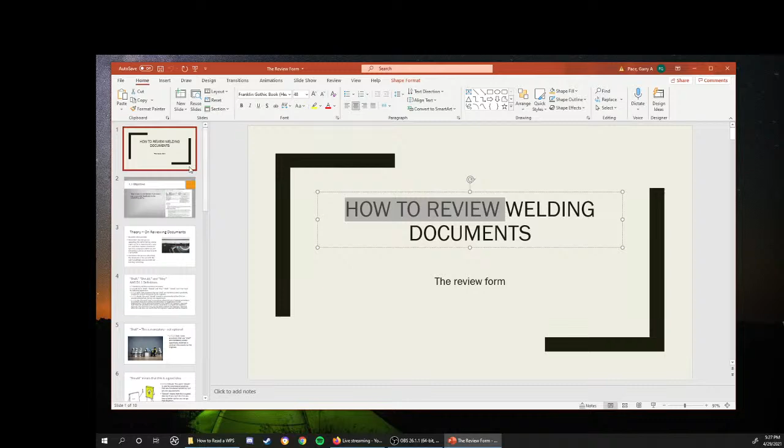So we're going to get back to talking about how to review welding documents, kind of a conversation I was having yesterday. I'm going to rehash some of the stuff from yesterday before I dive into new material. See if anybody's going to show up. We had 10 yesterday, so maybe we can shoot for like 12, really break the curve.

So in regards to reviewing welding documents, my theory is, be polite. Not that I'm afraid to get into a scrap, a fist fight or a physical altercation, but to disagree with somebody in their interpretation of the code or what their deliverables are in regards to what the expectation is for a WPS and a PQR.

A lot of times, though, when you're reviewing WPSs and PQRs, the person that's the author of the document you're reviewing might not be as experienced as you are. They might have just gotten thrown into this. Maybe it's a new CWI. We've all been there, new in our careers, and wondering, what's this code stuff?

So, be polite. Sometimes it's a teaching experience. You're passing on some knowledge and explaining to people what you want and what you expect. That's one way to look at it.

And sometimes, if you go at it from that direction and explain stuff to people, the next time you need something from them, it's not nearly as acrimonious. But sometimes the person submitting the document might be a code guru, and you're the one that's maybe learning something from them. So this is something we need to keep in mind.

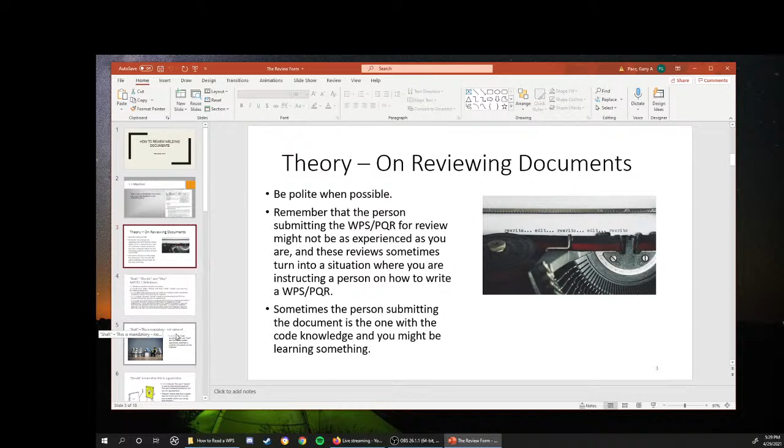Yesterday I covered shall, should, and may. Shall is, the empire's here, you got no choice. The stormtroopers are coming to get you, you got no choice. Mandatory unless specifically modified in the contract documents by the engineer.

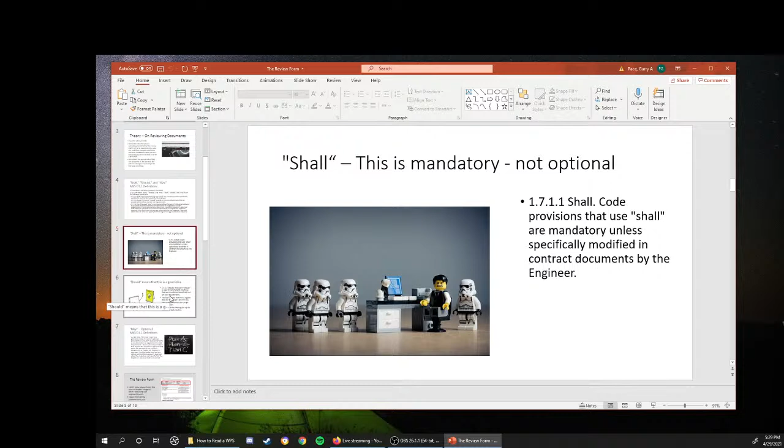So, shall. And these are the words that I use when I'm trying to explain something to somebody. Shall. Should. Should means, hey, this is a good idea. This is setting you up for success. Should means it's a good idea, but if you can't do it or you have a better option, you can go that direction. Should is just a best practice and a pretty good ticket to success. So that's what we're talking about with should. It's not mandatory, but it's a really, really good idea because they listed it in the code.

May is optional. You may do this, you may do that, you could do this. May is the complete other end of the spectrum from shall.

So, those optional procedures that require the engineer's approval shall either be specified in the contract documents or require the engineer's approval. The contractor may use any option without the engineer's approval when the code does not specify that the engineer's approval shall be required. So the engineer's got a lot of play in this too, in regards to the codes, what you can and can't do. If the engineer says, no, you're not going to do this, then that's pretty much the end of the discussion there. So that's where we got may.

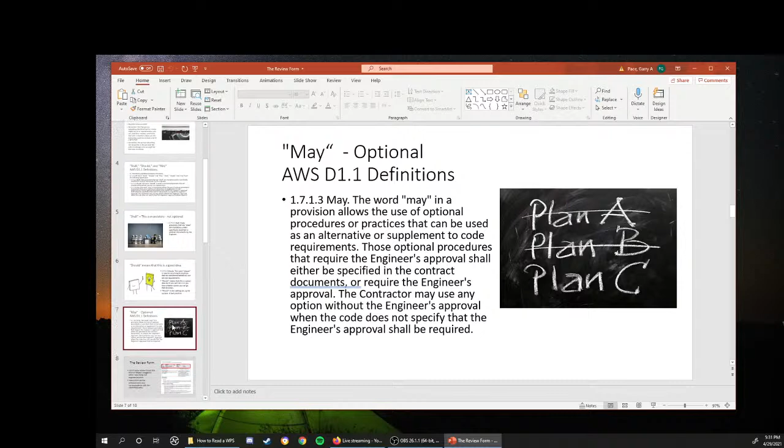And then I also discussed, and we'll keep coming back to this one, the review form. I like to have a review form. The review form I generally use is one that I made up, but we went through this yesterday. This is a grown-up way of communicating with the person, the organization, whose documentation you're reviewing. Instead of just circling a bunch of stuff on their WPS and throwing it back to them like you're a 5th grade teacher telling them to fix it, you explain to them what's needed.

All right, this is a little more work than just circling things, but if you do it like this, once you do one or two of them, the same code mistakes are going to pop up over and over. Once you get one of these sheets made up, it's just duplication.

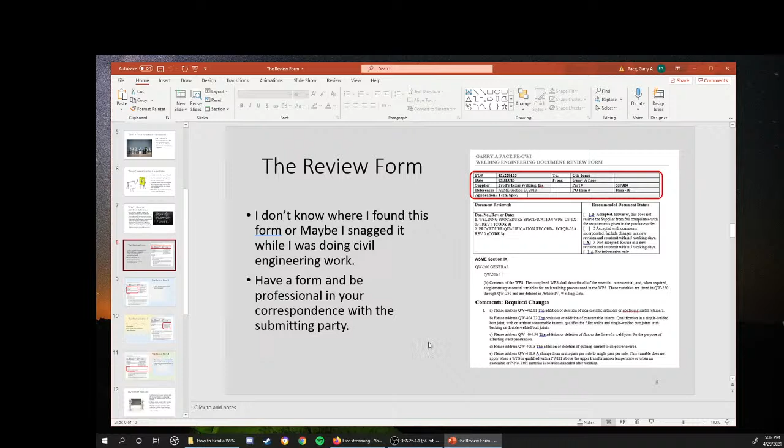So you can go at it this direction, or maybe there's some other directions, but I really prefer a sheet. And we talked about the documents that were reviewed and where to put things on these ones. The document disposition, accepted, not accepted. Different companies have different ways that they address this. There might be 4 choices or 5 or just 3. But this is what I use on the review form.

Does anybody have any questions?

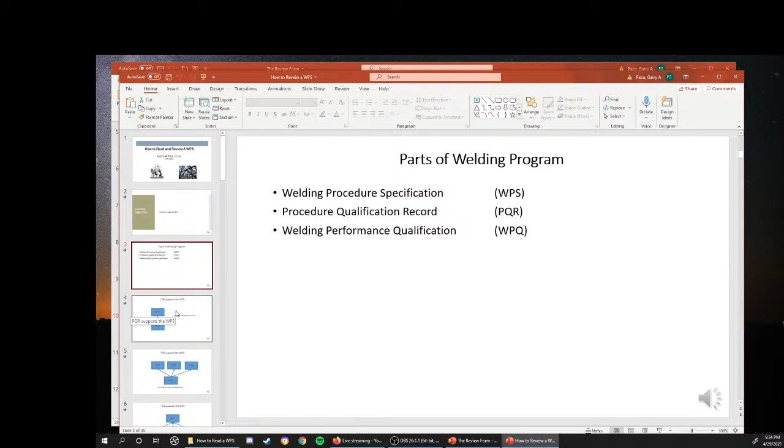So we've got a welding procedure specification, a procedure qualification record, and a welding performance qualification. Those are the 3 main tools of documentation we use to show people that we have grown-ups in charge of the welding we're doing. That's what separates somebody welding a dumpster from somebody doing pressure vessels. Nothing against our brothers in the materials joining field building dumpsters, but I'm just saying, these are the main parts here.

So the PQR supports the WPS. One PQR can support one WPS. This isn't a one-to-one relationship, this is a one can support. A PQR is much like a driver's license, and it would support a WPS.

Let me back up. A PQR is like a birth certificate, and it would support a WPS much like a birth certificate would support a driver's license. You can't get a driver's license without a birth certificate, or a passport without a birth certificate. A PQR is the same way. It's a base document that we use to support other documentation.

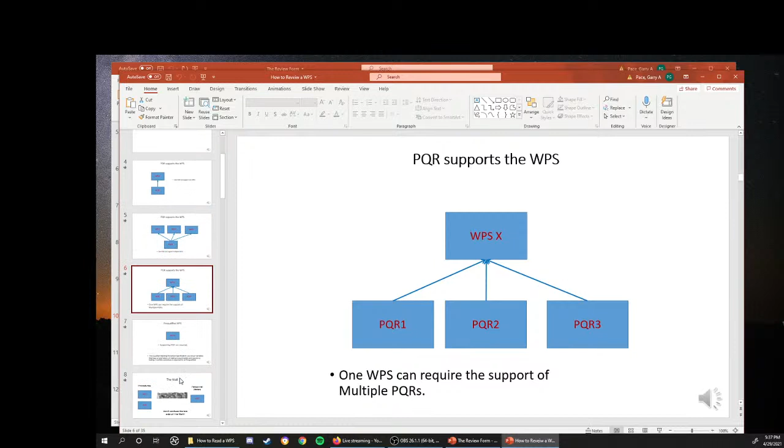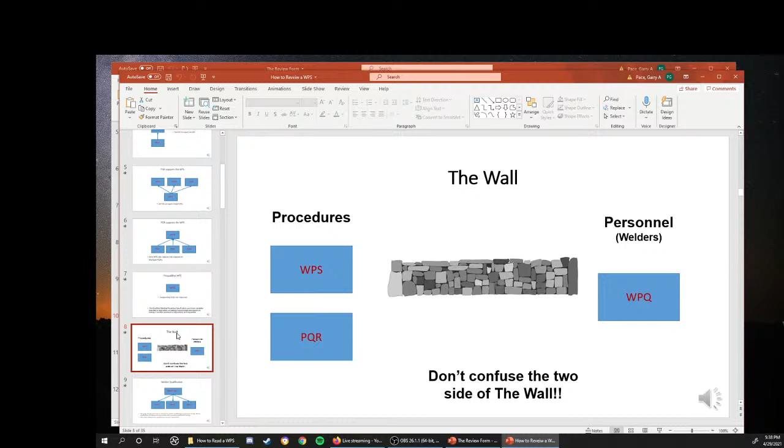All right, so another thing we need to remember is that there's a wall between procedures, WPSs and PQRs, and personnel. So we don't want to mix and match. When you're reviewing documentation, you need to realize the WPSs and PQRs are on one side of this wall, and then personnel qualifications, welder qualifications, are on the other side. You don't mix and match these, because you're going to confuse yourself and get into all kinds of trouble. So you need to realize this is how the codes are set up.

So in welder qualification, a welder qualifies to a process. The welder doesn't qualify to a specific procedure, a welder qualifies to a process. And generally there's only 5 or 6 essential variables for a welding process for personnel qualifications. So that's one of the things we need to understand. It's not nearly as restrictive as procedure qualification.

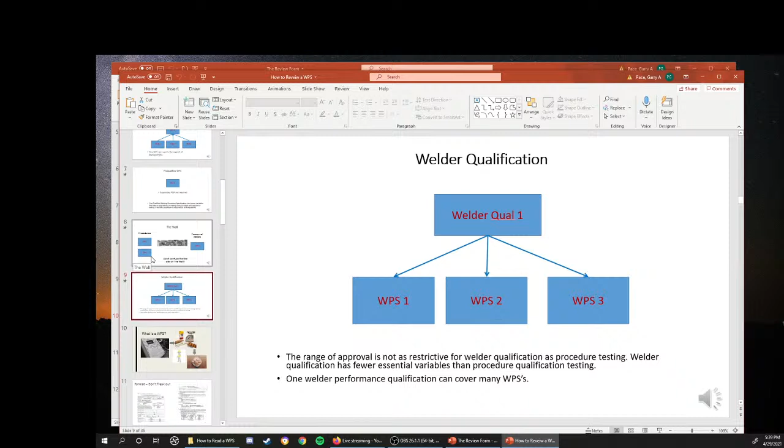So we already talked about yesterday, what is a WPS. A WPS is basically a recipe. It's telling us how to bake chocolate chip cookies, that's what it's telling us. If the WPS says we need to stand on our head and drink a Dr. Pepper while welding, that's what we need to do. That is not optional. A WPS is a work instruction, is what it is.

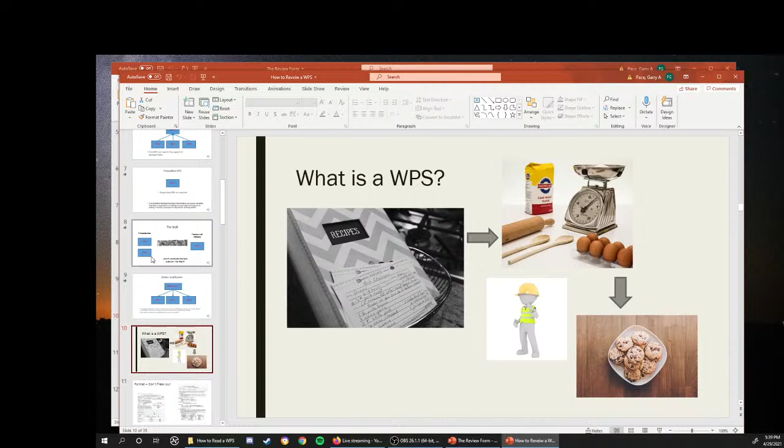And as such, a lot of times we need to review those. And I'm going to switch over here for another, see if I can find that other one. Does it make sense? All right.

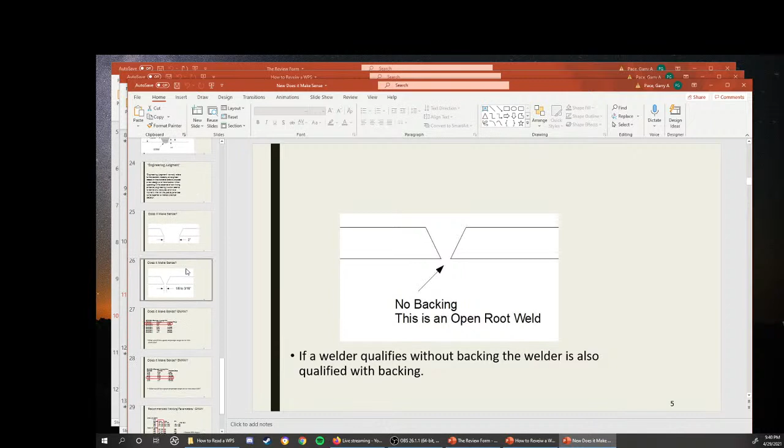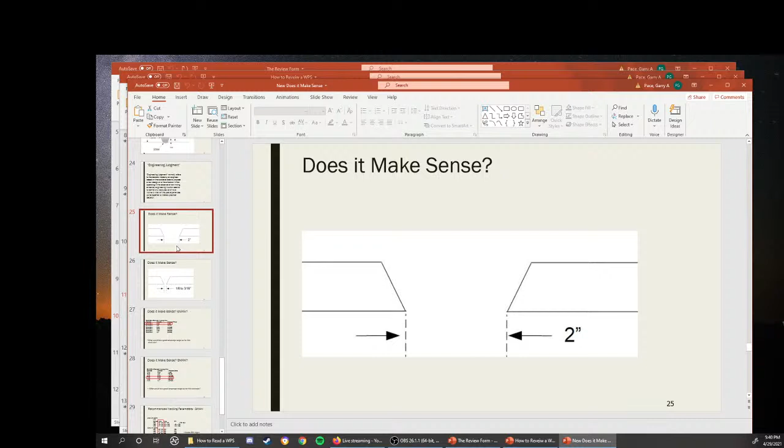So a lot of this stuff, when you're reviewing a WPS, you got to ask yourself, does it make sense? Does this make sense how we're doing this? Like if you look at the groove weld, and they have a super wide root gap that's 2 inches wide, you got to question that. Does that make sense? Why are they doing this? Did they qualify it this way? What's the idea behind this? If they qualified it and that's their joint design, but sometimes you generally have to ask, does this make sense? Makes a little more sense if you're at 1/8 to 3/16 of an inch, but it could depend on what kind of weld you're making or what your joint looks like.

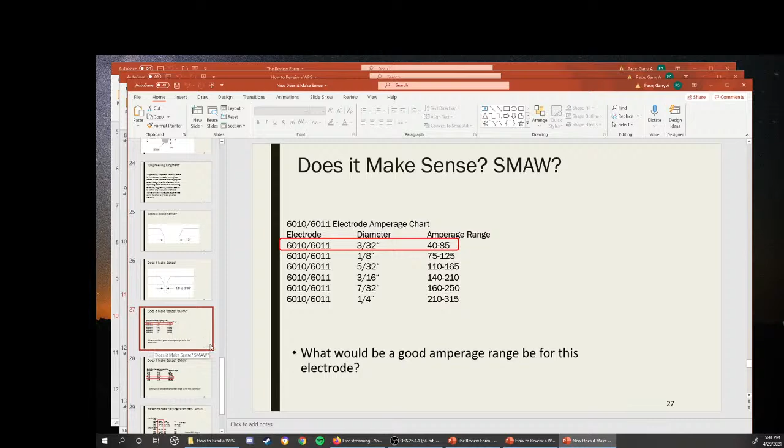And then when we get into electrodes, filler materials, amperages and voltage, you have to ask yourself, does it make sense? What do they have listed there? For 3/32 6010, generally we run that from 40 to 85 amps. On their WPS, would it make sense if they were running it at 300 amps? Probably not. So these are things we need to keep in mind when we're reviewing WPSs, is does it make sense?

So, all right, we're going to flip back here from does it make sense to format. Don't freak out. The formatting doesn't matter. Most codes have a recommended format, but if somebody turns in something that's a little different than what you are used to seeing, as long as they address everything, don't freak out on the formatting.

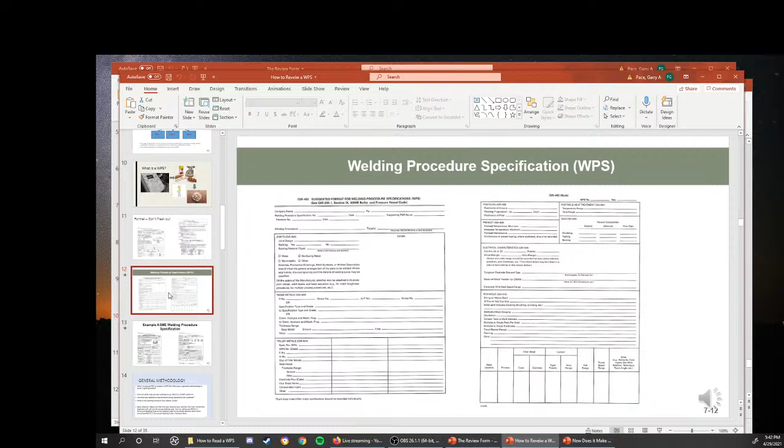And here's a standard WPS, ASME Section 9, and what it should look like. Should, and I say that in air quotes, should look like because of the standard suggested format for this. This is what the American Society of Mechanical Engineers offers up.

So my general methodology is I like to try and give it a quick check. Before I start reading the WPS too thoroughly, I like to just give it a quick check and make sure the correct company's there, WPS and supporting PQRs are there, or did they send me the correct code? Because before I dig into this, I want to make sure that the code matches up with what the work that is being done.

So, the welding process, the base metals, what do we got going on? If they submitted a WPS that has submerged arc welding and the project is sheet metal, does that make sense? Probably doesn't make much sense. So you kind of got to look at these and give them a quick once over before you really dive into it, and you start reviewing this and you realize, oh man, I got an hour into this document and there's no way they're going to use this WPS on the project.

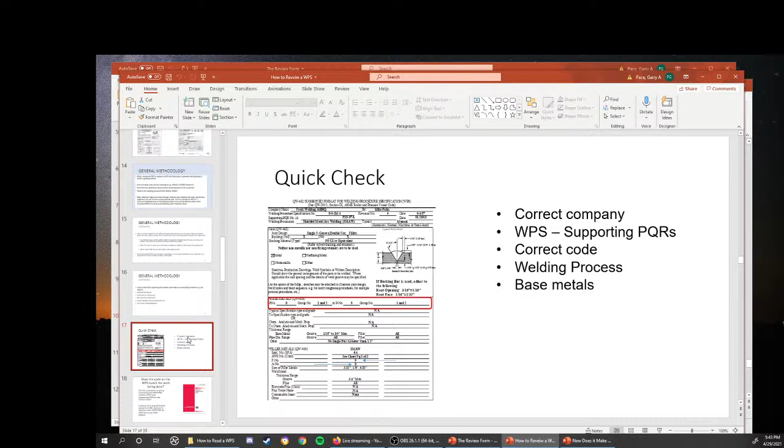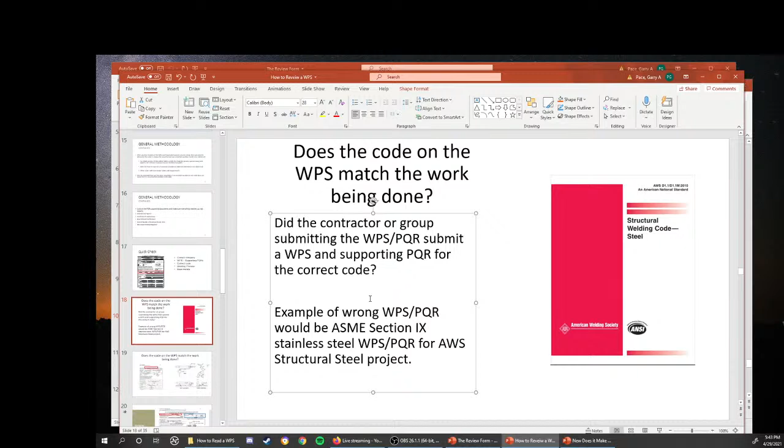And I discussed this yesterday. Did the submitting party submit the correct documents with the right code and PQR for what the work's being done? Did they submit a sheet metal welding procedure for AWS D1.1 work or vice versa? Or a stainless steel procedure for work that's structural steel. You need to look at these things and make sure that everything matches up.

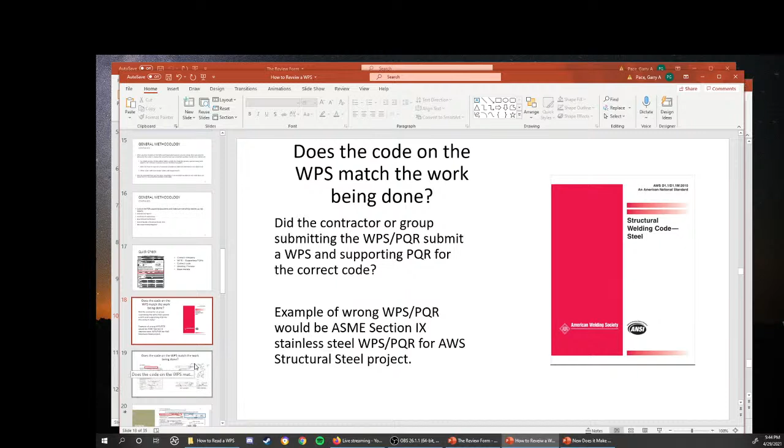Another one is you want to make sure that there's no, what do you call it, client requirements. When I worked out at the Hanford nuclear site, one of our requirements was that you couldn't use 7024 electrodes on any of the structural steel. It all had to be low hydrogen electrodes.

So that's something to think about. You could submit a welding procedure and it would be all well and good to the code, but our specification would have kicked it back. So these are things you need to also realize.

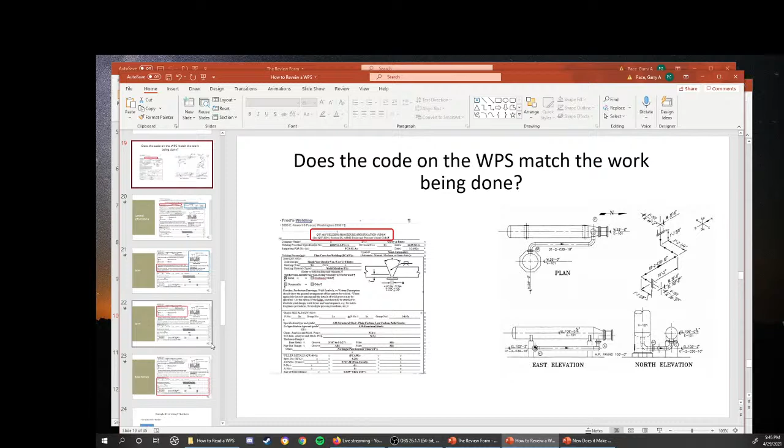Be familiar with the project specifications and customer specifications. One of the things I do is start looking at - I'm going to correct this slide too while we're digging through here. Make sure the company's right, who's it welded by, the dates, the revisions. So this upper part is just the general information on a WPS. Make sure they've got shielded metal arc, it's manual. Those are variables that need to be addressed.

Working our way down the WPS, we're going to look at the weld joint. They don't have to list the weld joint on the WPS as long as they are addressing it somewhere - they could kick it over to a drawing, sketches, production welds and symbols. You could say follow the drawing, whatever - weld symbol or weld joint clarification is on the drawing or on another document. That is perfectly legal to do if they're going to do that. It just needs to be addressed. That's a non-essential variable.

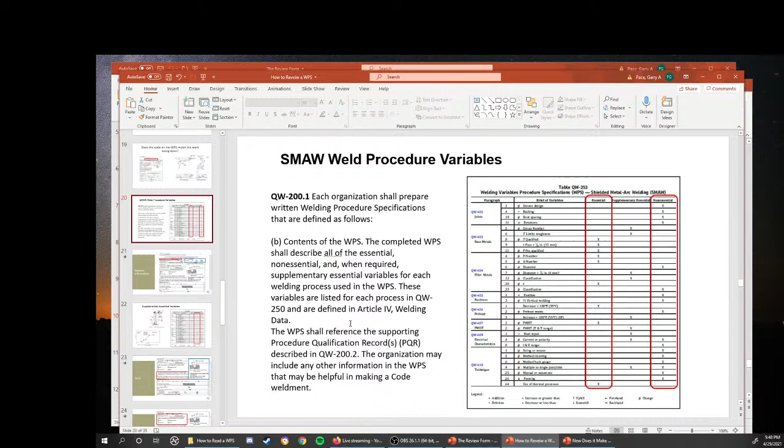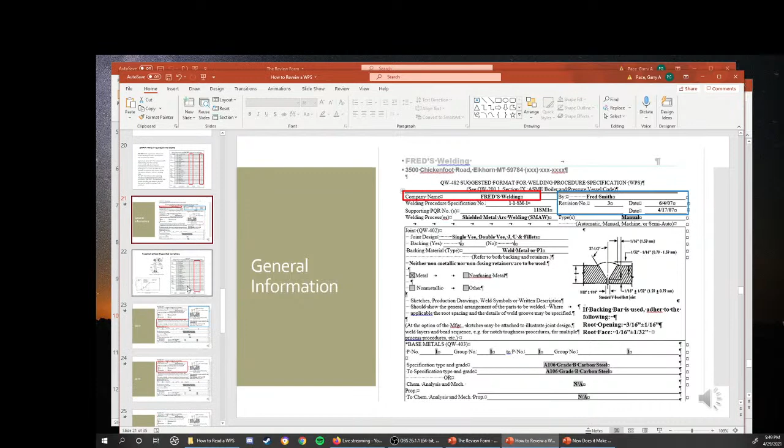So this is what we're going to run off of. I just go down through the WPS and check out all the different essential and non-essential variables and make sure they are addressed on the WPS. If it's a supplementary essential variable, that is brought into play if this is impact tested. If impact testing is called out somewhere and we're required, then we need to address all the supplementary essential variables. So if it's impact testing, you got to do essential, non-essential, and supplementary essential variables.

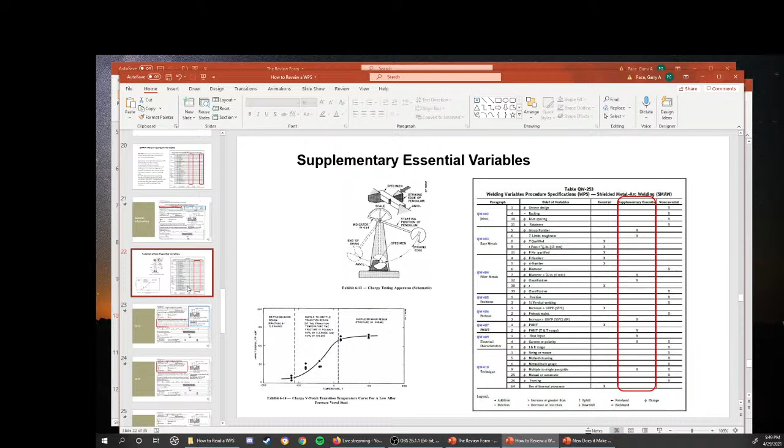So back to the show here. We were talking about sketches and joint configuration - they just need to address it. They can address it on other documents. You can address it, illustrate joint design, any of that stuff. You can address it somewhere else in production drawings, routers, whatever, as long as it's addressed.

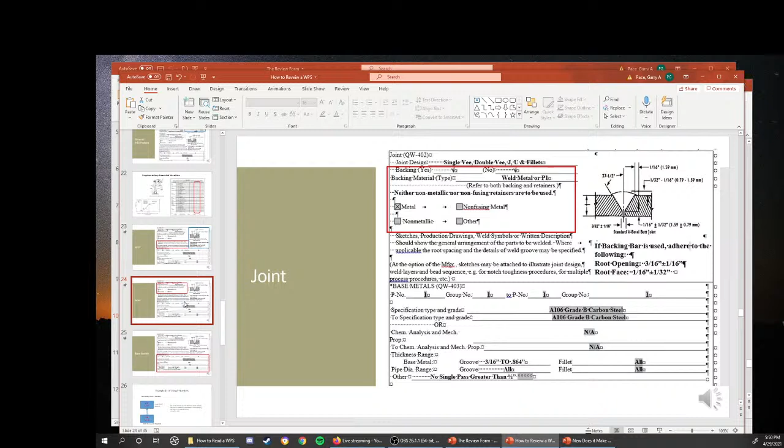Another one is you need to go through and check all these, like non-fusing retainers, what you're going to do for backing type. Is there backing? No backing? You can do yes or no. But this all falls under joint design, and these are ones that need to be addressed.

It depends on what - like I said, not every process has the same essential variables. Gas metal arc welding, well, gas is going to be an essential variable there. There is no gas in either submerged arc welding or shielded metal arc welding. So we have to understand some basics about welding. And then the other one is, okay, now we're working our way down through base metals. Base metals, as I discussed yesterday, there's P numbers, and P numbers are groupings of material - how close is this stuff to welding like itself?

It's grouping like materials, stuff that has the same weldability, general mechanical, chemical properties. This stuff is pretty much the same, but it's a different product form, or maybe there's a little more of a certain metal in there, but it's all pretty much the same, and it welds pretty much the same. So back in the day, ASME, the American Society of Mechanical Engineers, came up with P numbers.

So you didn't have to qualify every material ever under the sun because you'd go broke doing it. So then they just said, all right, here's how it is. We got different groupings. So this welding procedure is P1 to P1, which is carbon steel to carbon steel.

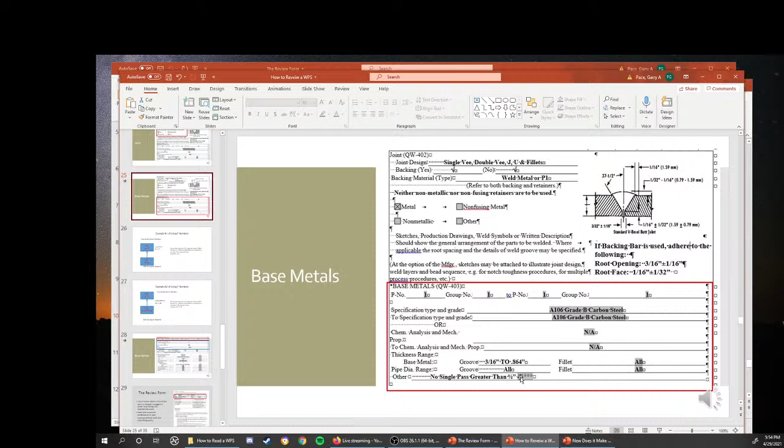Pipe range diameter, all. So yeah, and then no single pass greater than 1/2 inch. So these are all providing work instructions to the welder.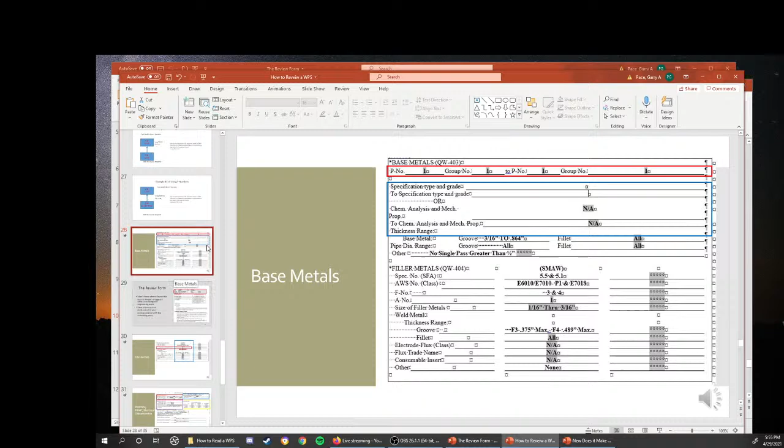So as I'm going along, I would be entering all this information into the review form. I would put it all in the review form, typing it up. And like I said, once you've done a few of these, a lot of this material is going to be the same. There's only so many things people can miss or get wrong or whatever. So a lot of this is going to be repetition if you do end up reviewing a lot of welding documentation.

But once you do a few of these, save them on a flash drive or whatever. All right, I'm doing an AWS D1.1, pull it up, change the PO number, the date, whatever, and go from there. But it's not, that's my, a lot of this stuff is just repetition. And once you've done it a bunch, it kind of just becomes repetition and repeating.

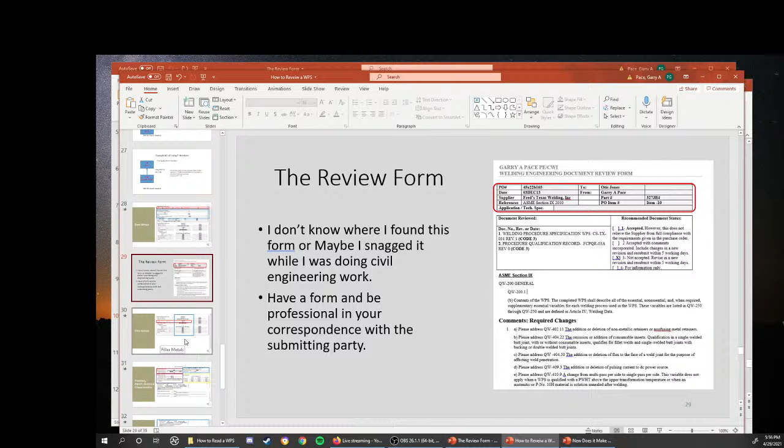And then here we've got F numbers. So this one was qualified with 6010, 7010, and 7018. So it's giving you the F numbers. So F numbers in ASME, it's the filler metal type. So F1 is like E7024, your standard issue jet rod where you just crank it up and puke it in there.

F2 would be something like a 6013, like a sheet metal rod. 6010 is a fast freeze, pipe liner kind of open root material. And then 7018 would be F4.

So here it's given us the materials, the F number and the A number. The A number is the chemistry. So you could have filler materials that have the same F number but different chemistries, depending on what they put in there.

So without looking at it, if I had a garden variety E7018, that's probably going to be an A1. I'm not looking at the chart right now. But let's say I had an E9018C3, if there is such a thing. Well, that's probably got a bunch of chrome and nickel and whatever else in there. So the coating is the same, and it's got the same F number, but the A number's different.

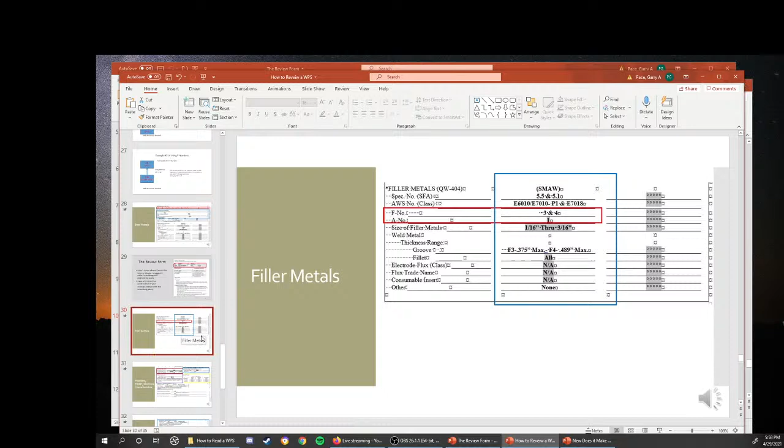But I'm just kind of giving you the general overview on how to review a WPS without getting super in detail into it. As I'm going through this, if I find something that's a discrepancy, I'm just dumping it back into my review form. Need to drink water there.

So another thing you want to look at is positions, post-weld heat treat, and electrical characteristics. For positions, you know, you got to know a little bit about welding here.

But if they had 7024 listed on the front page of their WPS, and then they're using all positions, well, that's not going to work because you can't run 7024 out of position. So some of these things you have to have a little bit of knowledge and understand the welding processes.

As far as, where is it on here? We'll get to it down here below.

So post-weld heat treat, I'm a big proponent of none. I think they came out with a code case interpretation where they said none and NA are pretty much the same. So I go with none.

Some people use NA. I'm a big proponent of none because I got beat up on it a bunch when I was working out at Hanford. So I'm a big proponent of putting none. If that essential or non-essential variable isn't used, I usually throw in none when I write them. But I guess I have to be a little more reasonable.

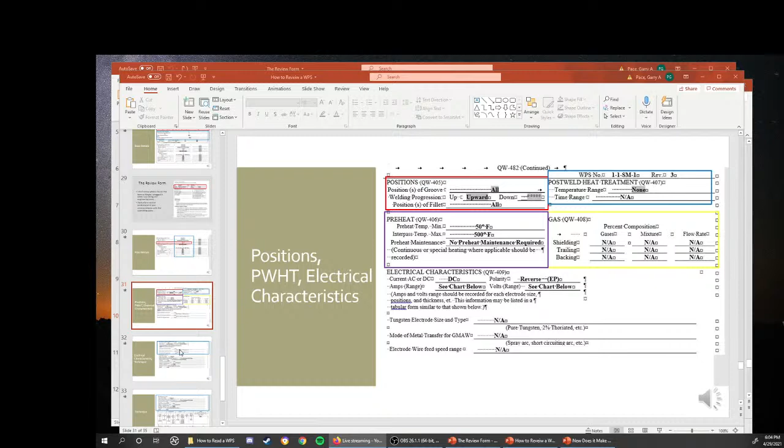Electrical characteristics, like I said, for the most part these don't get too crazy. But when you get into gas metal arc welding, this is where it gets kind of weird, and you have to really understand the modes of transfer and what's going on there.

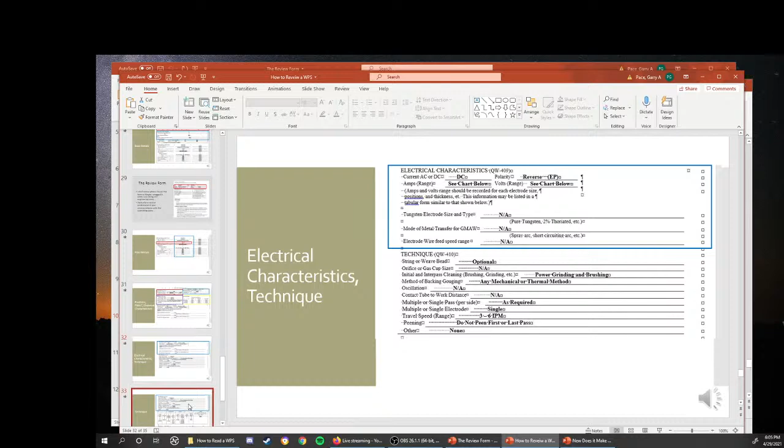Electrode wire feed speed range, all this stuff can be addressed. Let's see, where are we at? We get down to, okay, so then we get down to technique. Most of these things are non-essential, so you just need to be cognizant.

I've hit people a lot on this. I cut my teeth in the nuclear industry, so I'm kind of picky, and that's where I started reviewing WPSs, so everything had to be perfect. I learned that way, so I don't cut a lot of people slack. I just go over it and then address it.

And then the string or weave - is it a weave or a string? You can say both, it's addressed. Orifice or cup size - if this is a shielded metal arc welding one, we're not going to use the orifice or cup size, so it's not applicable. But if you were using a process where there was an orifice or gas cup size, list it. Pick some sizes, a range between this and this that you're going to use, and go for it.

When you're writing them, you've kind of gotta ask, does this make sense? Power grinding and brushing, all this stuff just needs to be addressed. Oscillation, none. Contact tube to work distance, you just need to address it. And once again, if you're reviewing it, you have to understand what they're writing and be like, okay, does this make sense? Or, all right, they've addressed it, I'm going to let it go.

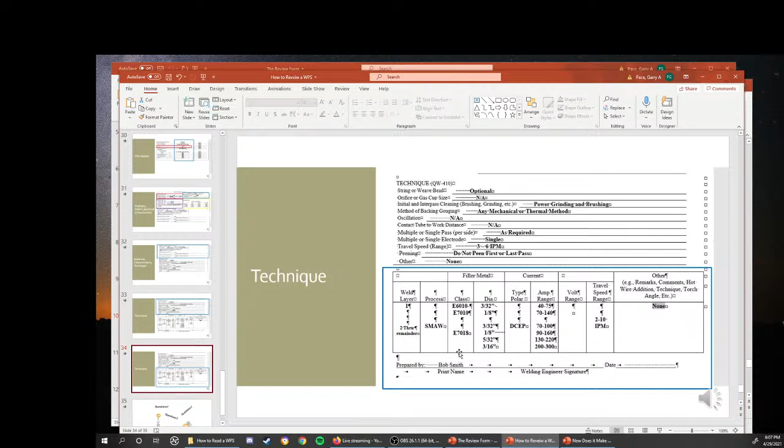But that's kind of some of the general techniques when you're reviewing a WPS. It's like you're looking at it, you're checking it against the code, but you're also checking, hey, does this thing make sense? You know, does it make sense? All right, and I guess that kind of covers it.

Other than getting back to, you know, our review form, and then you're gonna wrap it up. On your review form, any discrepancies you found in your WPS, you're just gonna write them down here in your review form, and send it back to your customer. So, has anybody got any questions?

As far as duplex stainless steel WPSs that I have reviewed, those things can get messy, so you just got to dig into them and make sure they address all the essential, non-essential variables and customer requirements. Usually there's a bunch of customer requirements in regards to metallurgy, the heat affected zone, G48 testing, and material variables like that. They're just messy and long. Generally a duplex stainless steel WPS is like 50 pages because everything is usually put in there.

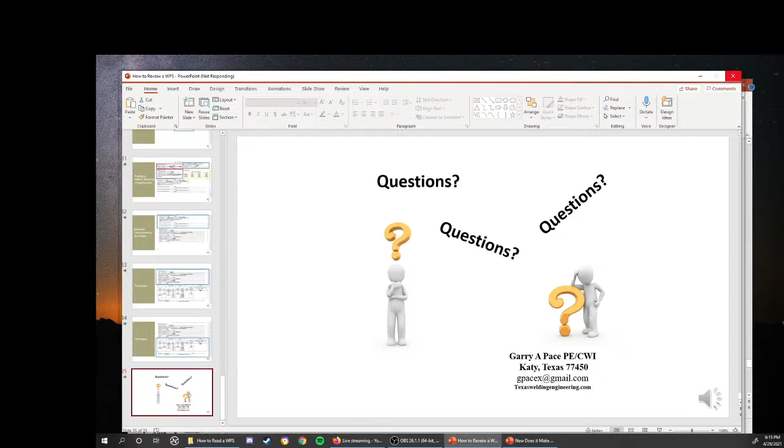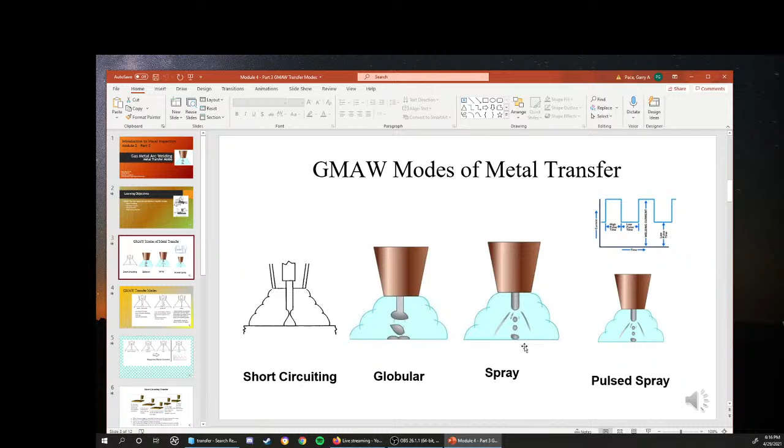So short circuiting is less than 20.5 volts. You can do out of position welding with it. You're going to get cold lap and lack of penetration if you don't know what you're doing. Spray transfer is over here on the other end.

Yes, Robert, you can tell transfer modes by sound. Yes, I had some questions made up for my students. I can tell the transfer modes by the sound, and I can't. You're going to have to go online and do a Google search for a couple different... what do you call it...

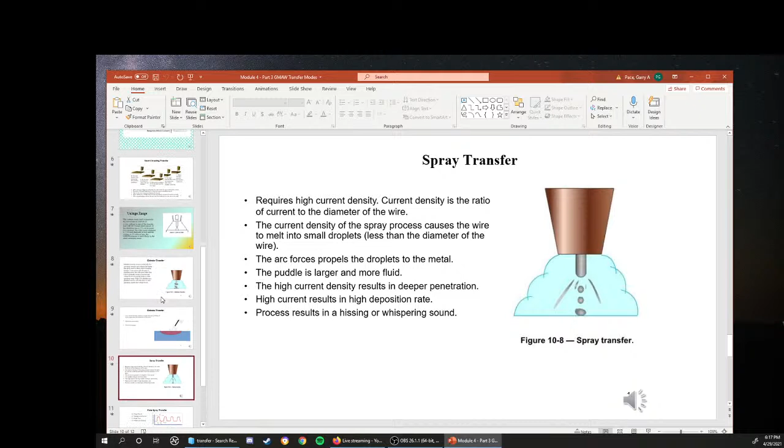Oh yeah, let's see. Let me know if you can hear this. No, I don't have them. I thought I had slides on here with the sounds.

But voltage, let's go back. Okay, so as you're moving from left to right, you're going to start with low voltage. Globular is more voltage. Spray is even more voltage. But this only happens if you got 75 or 80%.

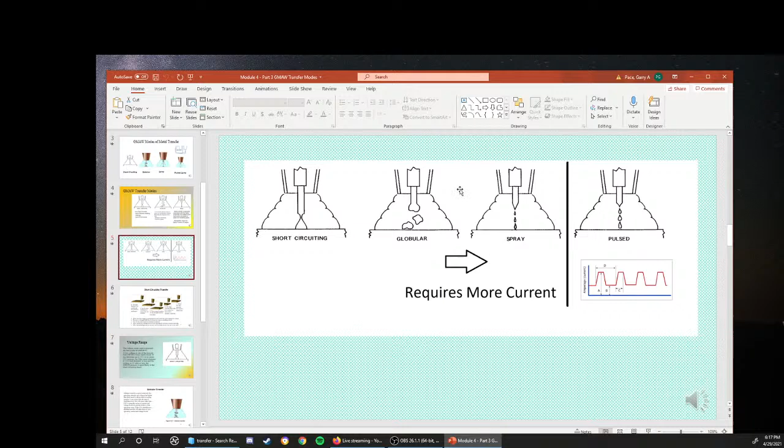75 to 80% is the minimum amount of argon you can have and have spray. Anything less than that, if you got 50% carbon dioxide, you're not going to get into spray. You're going to stop right here at globular. And globular has low current density. Like I said, spray needs 80% argon for spray transfer to happen, and you need a higher voltage - anything above about 20 volts, depending on your amperage too. But for me, I always go by voltage, about 20 volts, and depending on the size of your wire too. That's going to play into it.

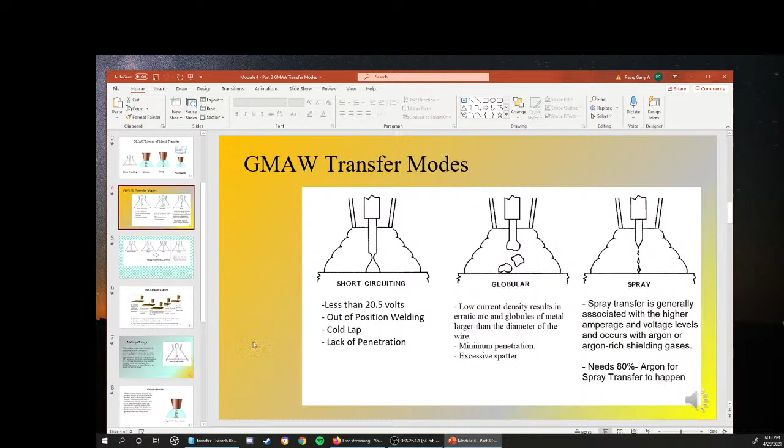I wish I had that one with sounds on it. I got that one. Oh, here we go. Let's see. Let me know if you guys can hear this. All right, OBS sound source. Source is audio input capture. All right, let's see if this works. I don't know, I'm still trying to figure out OBS.

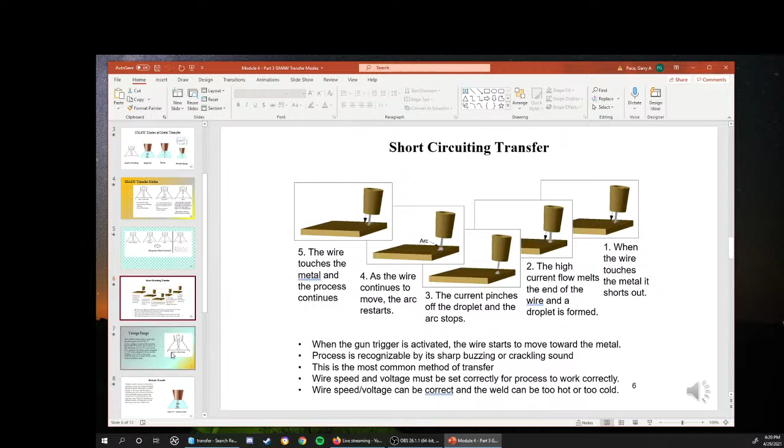Yeah, I think I have this one built in. I think I built this into my channel. So, oh, you did hear it. All right. Gas metal arc welding, Alief School.

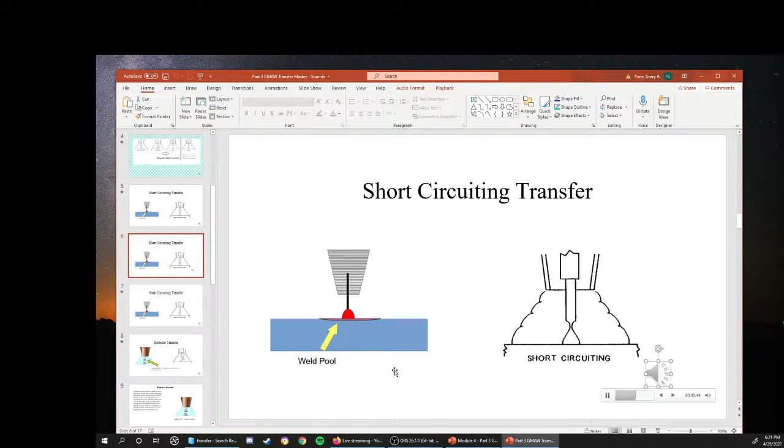All right, so let's listen to short circuiting. Okay, you heard that one?

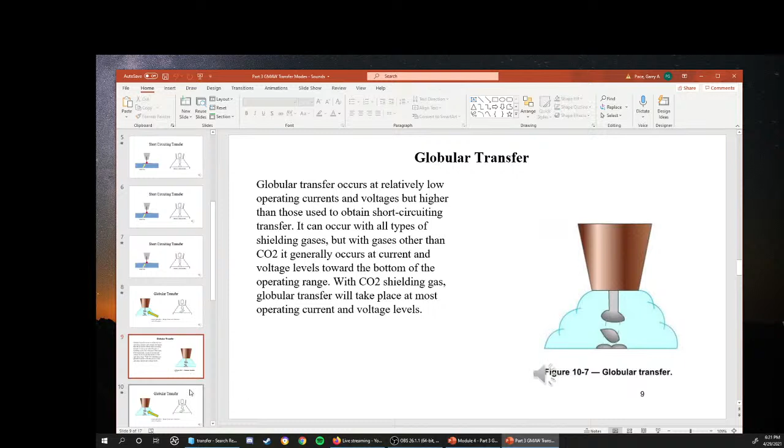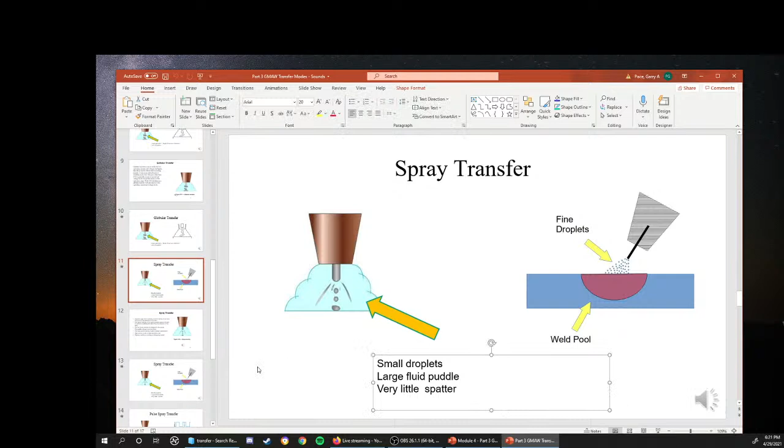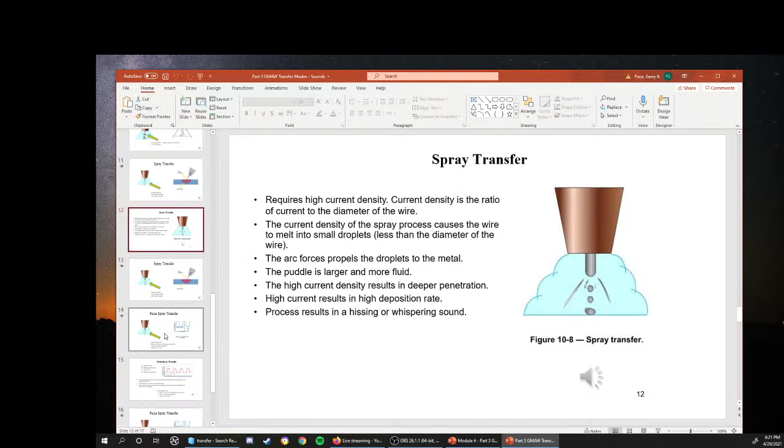That's globular. Let's see. Next up is... and then let's see. Okay, that was...

Yeah, you can tell there's a big difference between the various processes. I can hear it. I've walked by welders out in the field and heard them running flux core or running something, and it's like whoa, whoa, whoa, whoa, or they're supposed to be running spray transfer and they're running short circuiting. It's like, what are you doing? You're not running where you're supposed to be running. So that's one of the things you can definitely tell - it's definitely not a myth.